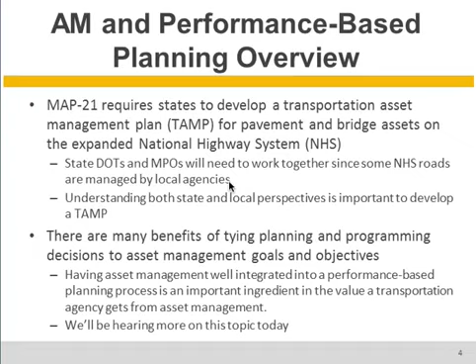I'd like to speak briefly about the importance of linkages between asset management and the transportation planning process, particularly about the linkage between asset management and the transportation planning products, such as the statewide plan and MPO plans, and also the programming documents, the STIP and TIP. We've made a lot of progress over the last several years in improving the linkages between transportation asset management and transportation planning. And some people might even say that asset management really is planning or a part of planning.

There are new requirements under MAP 21, as Steve mentioned, for a state asset management plan for the NHS, and also for a financial plan to support the state asset management plan. And those asset management plans should support and be linked to the development of the statewide and metropolitan long-range plans and to the state STIPs and MPO TIPs. And MAP 21 increases this emphasis and places a lot of emphasis on system performance, not only in the planning process, but all throughout MAP 21.

The planning process, particularly the programming documents, such as the STIP and TIP, is where the financial decisions are made for transportation investments. And needs and priorities that are identified in the asset management plans need to be reflected in these programs in the MPO TIP and STIPs. And the financial plans for the asset management plan should inform the financial plans for the statewide and MPO long-range plans and the financial plans for the STIPs and TIPs. So MAP 21 has provided a lot of linkages here for us between asset management and the planning processes.

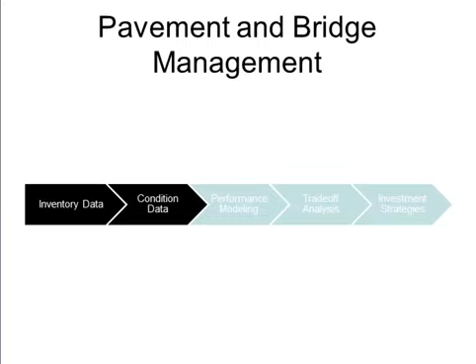Next. Prior to the development of sign management and the district transportation plan, Kentucky's maintenance rating program was the primary operation method for identifying conditions and needs for physical assets beyond pavements and bridges. Since 2000, Kentucky has been rating random roadway sections to measure conditions of features such as ditching, guardrail, striping, and signs. Beginning in 2007, we began using our maintenance rating program data to supplement district maintenance budgets for the purpose of addressing operational needs. Next.

Because of the new reflectivity standards in the 2009 MUTCD, Kentucky began to look to sign management as a way to address the new mandate. As we begin development of the management of this new asset, we first have to focus on our inventory, where the signs are, and the conditions of how they are performing. To develop our inventory of existing signs, KYTC has primarily used two methods, our photo log data extraction method and our field data collection process using GPS.

To determine the condition of signs, we are beginning by conducting nighttime visual inspections to identify signs which fail to meet the reflectivity standards. We are also using these inspections to identify signs which may not be effective due to other reasons. Ultimately, we plan to move toward the use of control signs to determine when a sign should be replaced due to reflectivity concerns. We have built two test decks for sign blanks which will be monitored at regular intervals in order to create a performance curve to help guide us. Next.

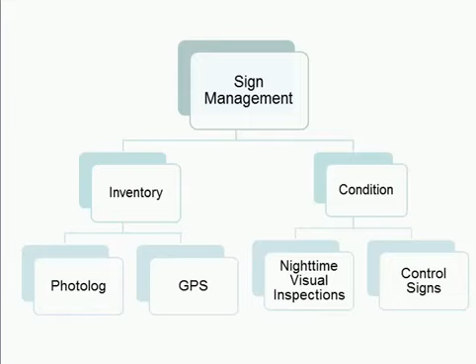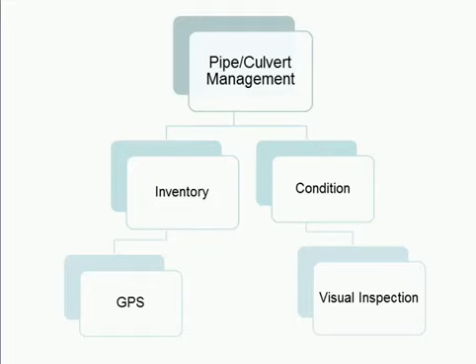Kentucky's pipe and culvert management program is just in the early stages of development. The program was initiated at the district level. We are using handheld GPS devices that were initially used for the collection of maintenance rating performance data to collect the location and feature data for pipes and culverts. At the same time, condition data is being collected. Next.

As we move on into our traffic operations area, we used a union of wet weather crash locations and curve location data in GIS to establish a long list of candidates for our high-friction surface areas. Then we used a minimum crash threshold of 8 crashes in a 5-year period. Once visual verification for the data union could be accomplished, then the individual site visits were made to inventory pavement condition and to confirm the locations where we wanted to apply our high-friction surface areas.

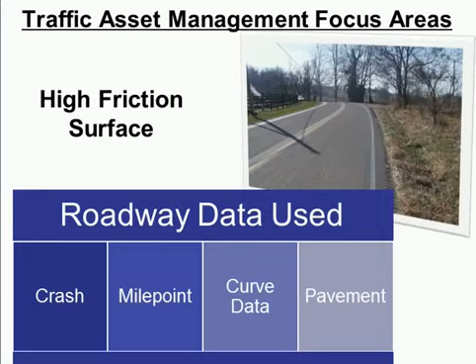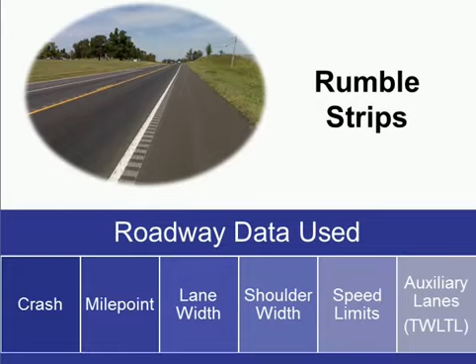Next. In our traffic operations, we're using crash data, mile points, shoulder width, roadway types, and lane widths to establish a list of roadways where center line and edge line and shoulder rumbles could prevent run-off-the-road crashes. Next.

Our Highway Safety Improvement Program has a goal to target the most common type of crashes at the most common locations: our roadway departures on rural 2-lane highways. We use the data union of our 2-lane rural highways, undivided roadways, with speed limits greater than 50 miles per hour, with crash types indicating that they are definitely roadway departures. Next.

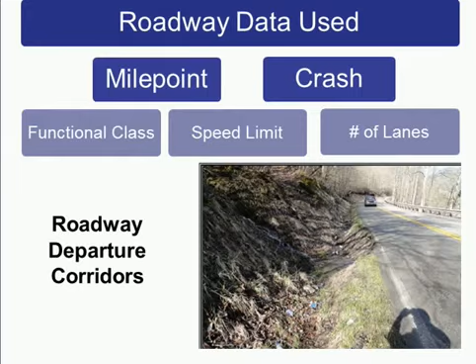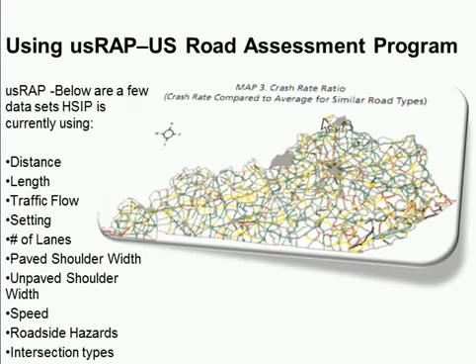The usRAP slide is pretty self-explanatory. We're beginning to use these listed attributes to evaluate and prioritize projects that we receive from our highway districts that are not part of the regular safety initiatives. While these 10 items are the items we're currently using, the program itself will work running up to 52 different roadway attributes. Next.

As we move into a more traditional planning for new start projects, Kentucky currently has over 2,400 projects on our unscheduled needs list to add to our operations program as we begin to evaluate new start projects. These have an estimated cost of over $60 billion. Basically, if we do not add anything else to what we have listed with our routine maintenance, our work is taken care of for the next 120 years.

Better defining our vision to our asset management allows us to identify what we call our new starts from our normal operation program and through identifying our greatest needs. Next. At the core of our statewide planning efforts are our metropolitan planning organizations and our area development districts that provide our input from our rural areas. Through these relationships, we obtain 2 of the 3 components that we believe necessary to accomplish our planning process, and that is our local officials' input and our public input. But how does Kentucky bring in the engineering component?

Next. As we begin this asset management data-driven effort for new starts, the first thing that we had to do was to establish goals to lead planning and our project identification process. The old ways, in a more subjective transportation world, were to select a project, then try to justify why it was selected. We decided we needed to establish statewide transportation goals while focusing the objectives in each district based on the specific uniqueness of each area. Next.

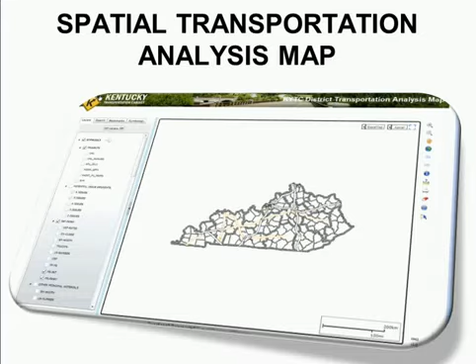Our asset management reviews were made possible by creating a spatial transportation analysis map. The process began by applying a very detailed and documented comprehensive review of the transportation needs of each highway district using a spatial transportation analysis map. Next. It began by identifying priority routes for each of our highway districts. Next. We then, using our mapping tool, showing our data spatially, revealed our needs such as crash, congestion, geometric deficiencies, maintenance needs, and a variety of others not listed. Next. These are just a few of the key components that we used out of our highway information system to help guide us. Next.

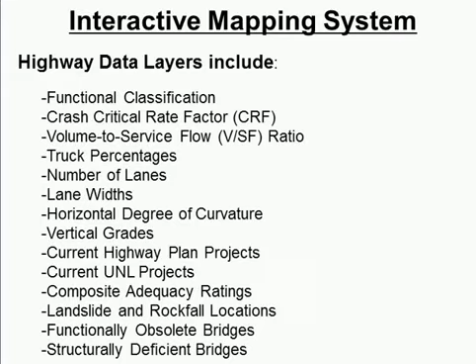At each district, we then set up and established a multidisciplinary team made up of persons representing maintenance and traffic operations, our planning office, design, construction, our MPOs, and our area development districts to develop their plan for a region by fulfilling the goals that helped identify the objectives that they had helped establish. Next. Kentucky is made up of 12 highway districts. And this led to 12 individual reports, one for each highway district, that were then compiled into one statewide transportation plan for unscheduled projects. Next.

The unscheduled needs list was analyzed by the team using the data to set priorities. The highest priorities were determined based on the severity of their needs, as spatially shown on this map of one highway district, and they would then be moved to the unscheduled project list. Next. The unscheduled projects list is then ranked by each district in their district plan, with the top 30 actually being identified and recommended on the unscheduled projects list. These projects included the goals and objectives satisfied being documented. This was something that was not done in the past; we would have a lot of discussions, but we did not necessarily document the reasoning behind the project. So as these were documented, we would develop all of the phase costs necessary to complete the project. Next.

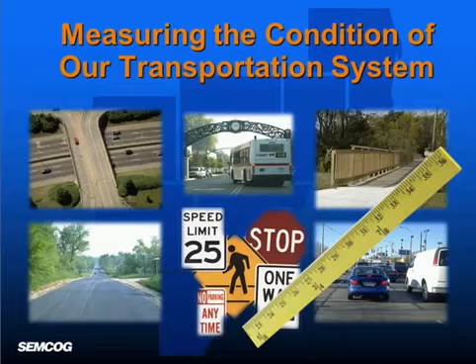This is something that we've been tracking through an asset management effort statewide, where we go out every year and collect the pavement condition on half the roads of the federally eligible system. And this is a statewide effort led by our statewide asset management council.

So unfortunately, the lack of investment comes with a bigger price tag. By deferring the treatment to future years, it's estimated that the cost will double. And this cost from 2004 to 2012 is looked at as going from just under $1 billion to just over $2 billion.

So it's because we've collected condition data for all the eligible roads since 2004 that allows us to perform analysis of various strategies and budget scenarios for improving roadway conditions. And this is using a tool, Asset Manager NT, which is something available to everybody out there. And this is something that was tailored for our use in the SEMCOG region.

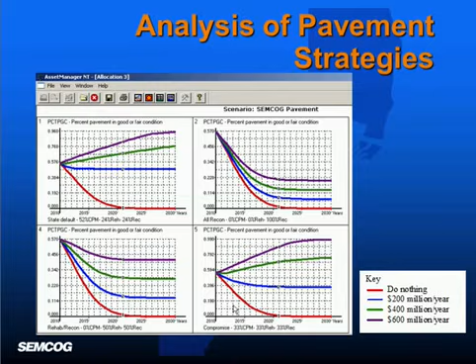This slide shows the regionally preferred strategy of spending 33% equally amongst the 3 different treatments: capital preventive maintenance, rehab, and reconstruction. So this analysis, along with examples like the one shown here on this slide, clearly show that it's not just what we spend, but how we spend it.

If we spend 10% on prevention of a $400 million budget, we actually may see the conditions of roads deteriorating even further, from 70% good and fair to 40%. However, if we spend 50% on capital preventative maintenance, we can actually maintain what we have. And again, if we spend even more on capital preventive maintenance, the percent of good and fair roads would actually improve from 70%.

However, it's great to tell the positive side and explain that to the citizens and the local elected officials, but it's always good to point out the negative side. Even though you have 70% of your roads in good and fair condition, you still have 30% of your roads in poor condition, and that's something to disclose as well.

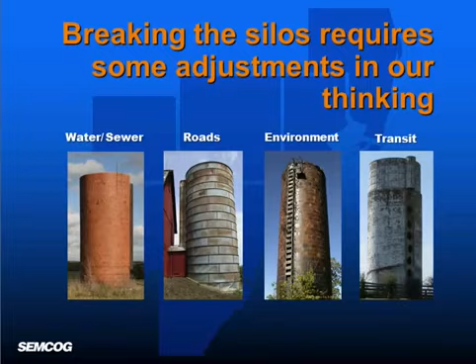So historically, this has been the biggest challenge, is really breaking the silos. The creating success approach that SEMCOG is looking at is, again, taking those same transportation partners, but using these 6 outcomes, these very high-level vision goals, and determining what are the actions in order to address those goals. Now, because the federal, state, local partners have been involved in the process, you'll see more of an alignment of the actions in order to achieve these higher level goals.

So when developing this process, we need to address both the technical side, asking ourselves, what is the cost effectiveness of various strategies and scenarios? What is the total cost of various targets? And we also need to look at the policy side, asking ourselves, what are the implications to the transportation system? How do differing targets impact other outcomes? How do we select targets, and how do we assure actions and revenue allocation reflect those targets?